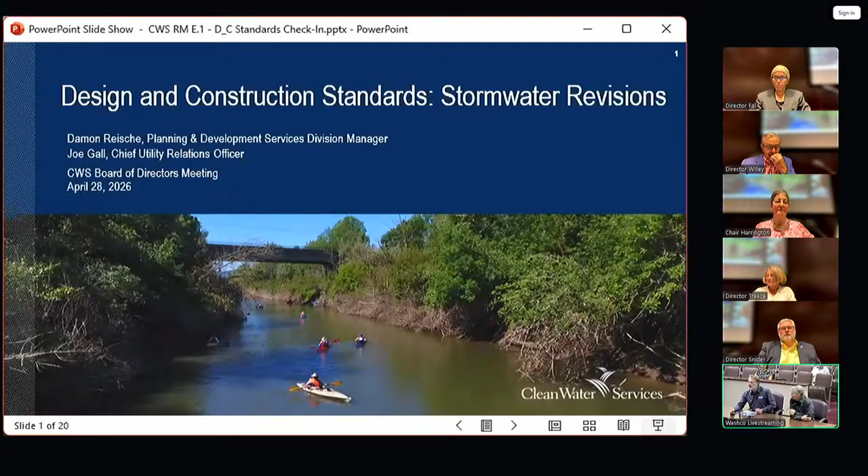Joe mentioned that this was really intended to be kind of a work session, so please feel free to ask questions as we go. There's a lot of information. We've been talking with different groups. This is kind of a summary of some of the discussions or topics that we've talked about, both with city partners and with CWAC. So please jump in if I'm saying something that doesn't make any sense.

The presentation this evening, want to touch on stakeholder engagement and our schedule. Want to talk a bit about some of the technical pieces that we're having to work through. That's the rainfall analysis, and that leads to how we size facilities and develop a design storm, and then criteria around how you decide what path you go down. And then we're on the cusp of a public draft, and so we'll talk a little bit about what you can expect with that.

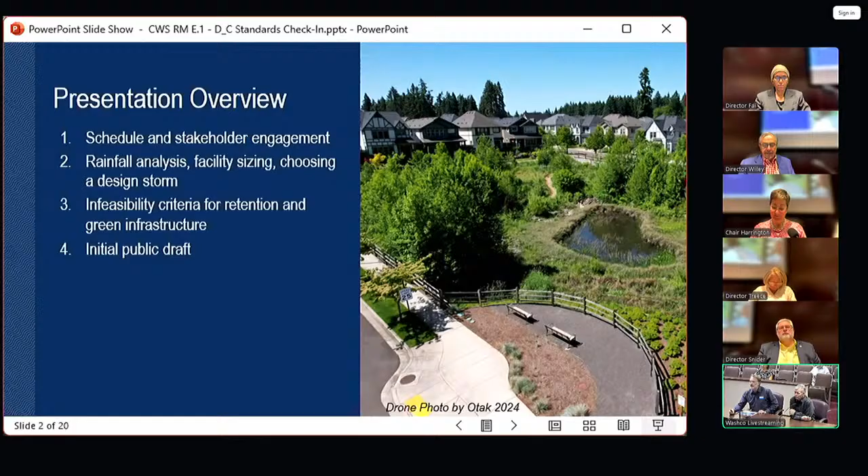Just as a reminder, this is a slide that you saw back in December. Really, why are we doing this right now? The update is being driven by our watershed-based National Pollutant Discharge Elimination System permit. We have a couple of things that we need to accomplish by November 1st of 2026, and that is to prioritize on-site retention, or it can be local regional retention of stormwater and pollutant removal. That's water quality treatment. And to do that, we have to develop a design storm. We also need to prioritize green infrastructure before either using hardscape controls or offset programs like fee in lieu.

Go ahead, please. Before you move on, I just have a question, so feel free to finish this slide if you want. No, I was about to move on. Oh, okay, thank you. So we've had a prior version of design and construction standards before. So under the why now and changes for compliance, I'm not clear on the why now. Is it that we gained experience with that and anticipated that there would be some needs through the next permit process? So we were giving ourselves a homework assignment, and now we're following up on that, or, sorry, I'm making stuff up. Nope, that's okay.

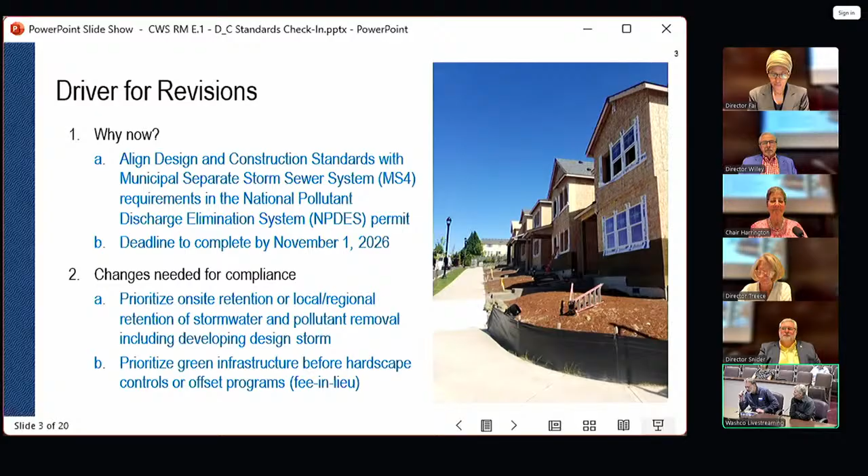So since we came to you in December to kick this off formally, we've been working with a CWS and city staff technical work group quite a bit to start to understand what we need to do, make some decisions. We've also engaged with our Clean Water Advisory Commission and formed a subcommittee out of that and have met with them. And we're just about to a point where we think we have something that we can release to the public that is coherent enough that they can understand what we're trying to do. That's the initial public draft. We're targeting the next few weeks for that.

We have a June 10 Clean Water Advisory Commission public forum scheduled. That'll be in the evening at 6 p.m., I believe. That will be an opportunity after the draft has come out for people to come and provide feedback and have some discussion with a variety of stakeholder interests.

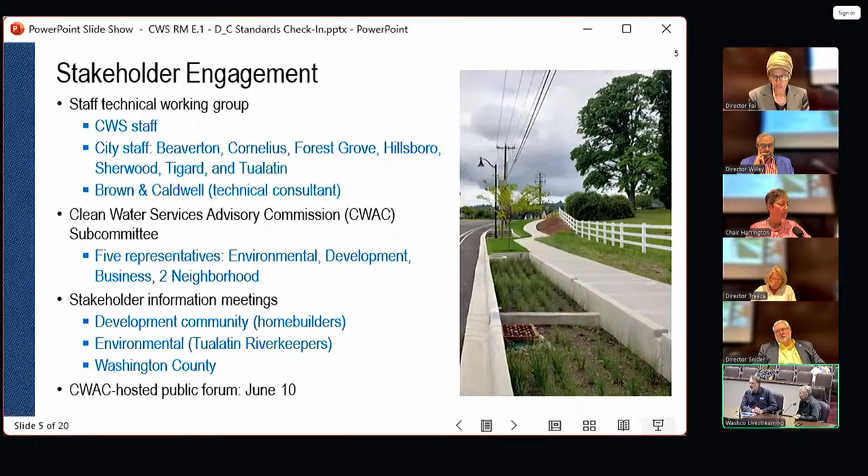It was also suggested during a CWAC meeting that maybe we could include the business community, and we're looking to see if we can go to a West Side Economic Alliance meeting. Just real quick, everybody who's interested can join or go to our website. We have a dedicated revision web page. It's most easily accessible if you go to our normal design and construction standards web page. There's a link right at the top. This is where all of our drafts will be posted and other information.

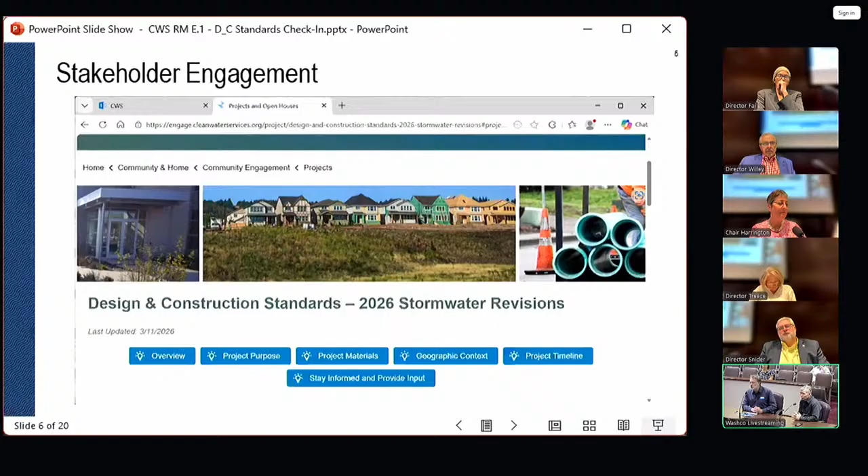We're also doing an email mailer that goes out. I think there's over 800 emails on the list. A lot of that came from developers and contractors that we work with that are in our permitting system, but we've also included other interested parties, and anyone can sign up to be on that. So if you run into people that are interested in learning more, they can go to this website and join, and it'll be announced anytime there is new information coming out.

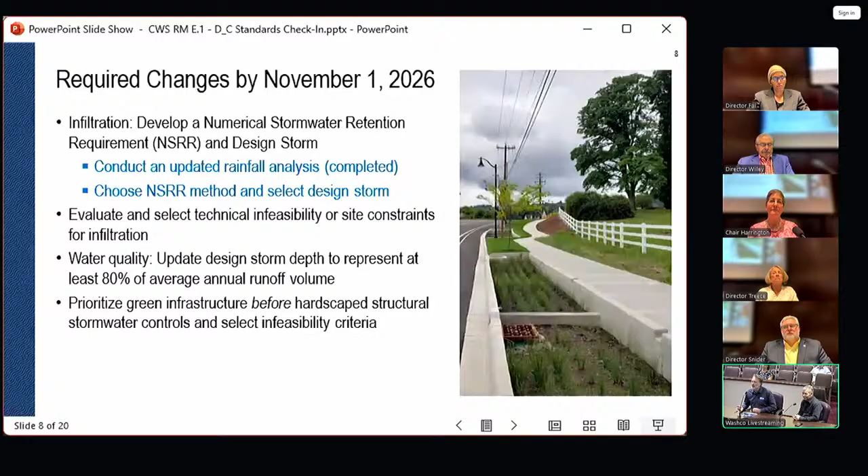So we could have two different storms that were developed differently, or we could use the same methodology, and working with our co-implementers we have gone down the path of using that same methodology. We also need to come up with what we've been calling infeasibility criteria for when you don't have to do infiltration or you don't have to do green infrastructure, what kind of bumps you into different categories.

A different way of thinking about this, a little bit more visual, is that you have this hierarchy that goes through the standards of first you need to retain or infiltrate. If that's not feasible, then you need to do at least water quality treatment. And if that's not feasible, then you can do water quality benefit offset. That's like paying a fee in lieu. With all of this, the priority is to have green infrastructure be the first choice, and kind of the same idea. If you can't do the green infrastructure, then there's got to be some reasons or criteria for when you can do gray infrastructure.

Got hydromodification off to the side. It's still a requirement. The permit is explicit that we still have to keep running that program, but really, we're going to talk about volume of a water quality storm. Hydromodification is also volume. It's a larger volume. It's more about the runoff and causing erosion in the streams. This is really focused in on water quality.

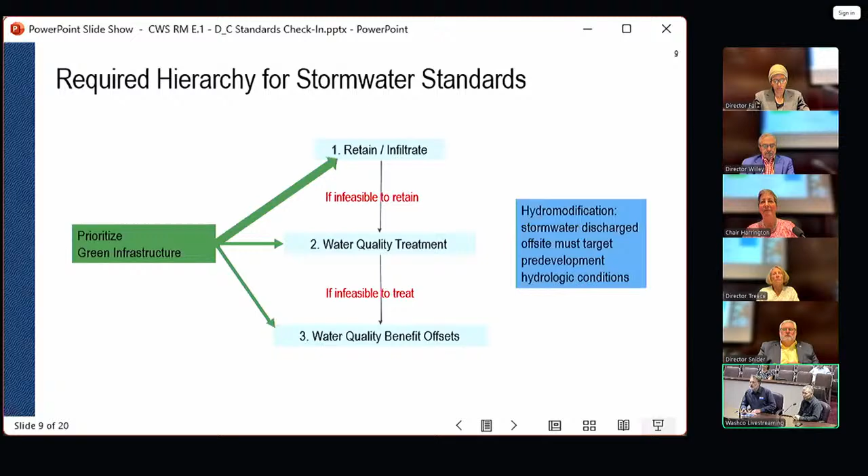So the rainfall analysis: we had an old rainfall analysis that had taken us through 2007, last updated in 2009. Our first step was to get new data up to 2022, what was available at the time. We looked at 16 gauges across our service district, took all that information, combined it, and using this average annual runoff-based method, basically what you do is you look at all the rainfall data for that entire period, and you clump rainfall events into these storms.

And the way that you do that is you figure out dry periods in between. They're called inter-event times. So the data looks different if you have a 6-hour dry period between what you call a new storm versus a 12-hour dry period between what you call a new storm. So are you lumping or splitting, basically, is what it comes down to.

And then you also have what they call this abstraction value. There's a certain amount of rain that doesn't really run off. It just gets the ground wet, and each jurisdiction has to kind of decide what that should be. We've used 1/10 of an inch so far. So that's very high level what the consultant did. There's a lot more that goes into it than that, and they run models to figure it all out.

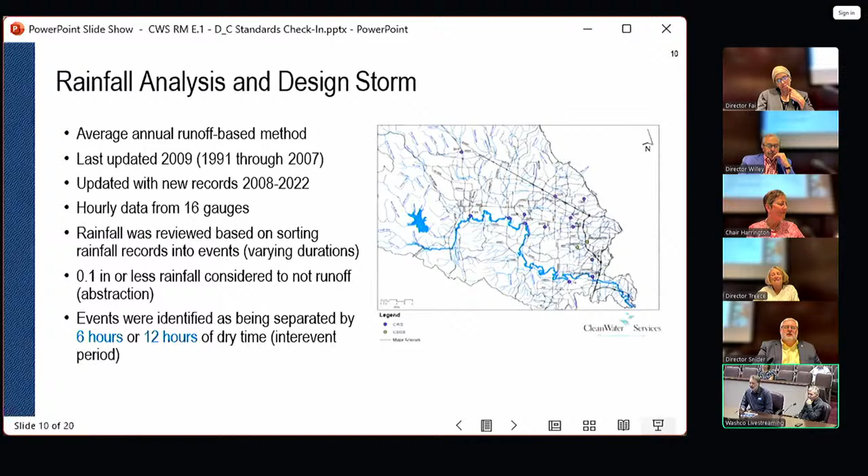Is that 0.1, can you go back? Sorry. Yes, absolutely. Is 0.1 inches or less considered to not run off at all? Is that sort of standard in the industry, or? Yeah, I don't specifically have that value in this next slide. Every jurisdiction's a little different. All those numbers are a little different.

Inter-event times can be different, but there are some jurisdictions that use numbers that are smaller than 1/10 of an inch and some that are bigger. The rainfall looks a lot different from one jurisdiction to the next as well. I'm going to talk about soils a little bit in a minute with infiltration. That can look very different from jurisdiction to jurisdiction.

So speaking of the standard and what everybody else is doing, we're actually the last Oregon MS4 permitted entity that is implementing this. Both the other phase 1s and phase 2s had to do this by 2024. We've got a little bit different kind of permit. We're a little bit behind in the cycle. That's why it's coming to us now. So we do have the advantage of seeing what everybody else did and trying to understand. So that was part of the evaluation.

I won't dig real deep into these numbers, but you'll notice that the very top category is Clean Water Services, and that our current water quality design storm is 0.36 inches in 4 hours. It's a really old method that was used back in the 90s. It doesn't even really equate to how we're talking about doing this now. So you can't scale it up. If you try to multiply that out, it doesn't work.

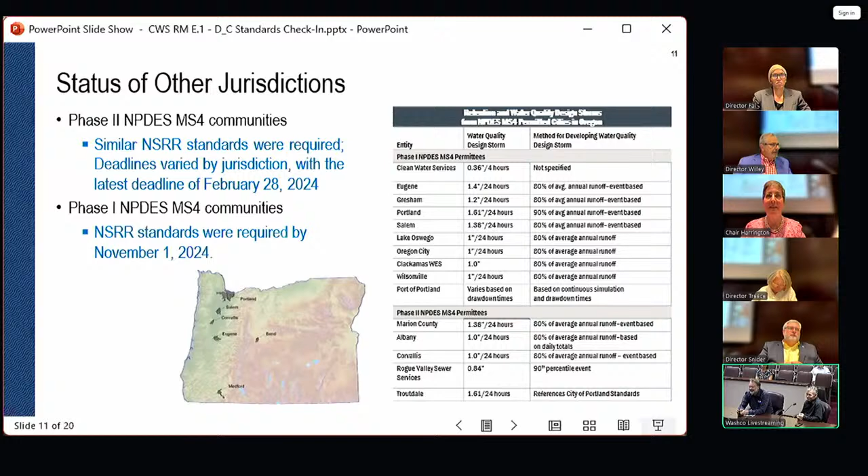Yeah. So I look forward to, before we adopt the final draft version, getting more of an overview about these design storms so that I can feel like I'm in the 2026 know versus back in the 2009 and 2022 know. Well, just wait. It's about to come. Well, you're always advancing our understanding of the important and necessary work that the agency does. So thank you. Yeah. I'm going to drag you into it a little bit here right now.

And just on design storms too, the district's got lots of design storms for different things, which is important to be aware of. So we have another design storm we look at for I&I on sanitary. And so design storm gets used a lot in engineering. So just be aware that we do have them for many different things.

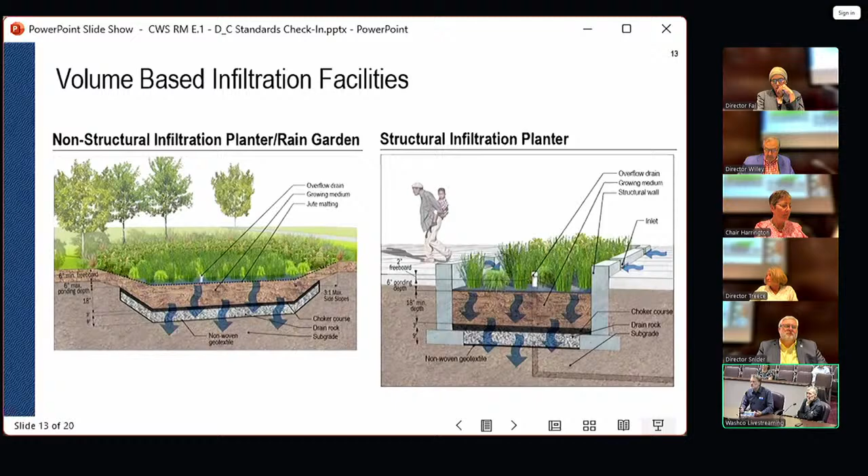So this is really a summary of all these results, the design storm, the sizing of rain gardens, what your different infiltration rates might be for different storms, along with different design storm numbers in there. So your top set of numbers, you've got the three main columns. You've got that 9/10 of an inch in 24 hours, 1 inch in 24 hours, and the 1.27 inches in 24 hours. So that 9/10 was, if I get this right, the 6-hour inter-event time, and the 1.27 was the 12-hour inter-event time.

Under that are infiltration rates, and we kind of covered a range of those. 2 inches would be very, very sandy soil that allowed water to move through quickly. 1/10 of an inch would be pretty clay type soil. And then we've got that blue column that's water quality treatment only. So then you've got rain garden and planters, and what sizing factors would be necessary in order to infiltrate the entire storm. So it's those three columns, the 0.9, the 1, and the 1.27. That's the size facility necessary to get all of that water into the ground within the 24-hour drawdown time.

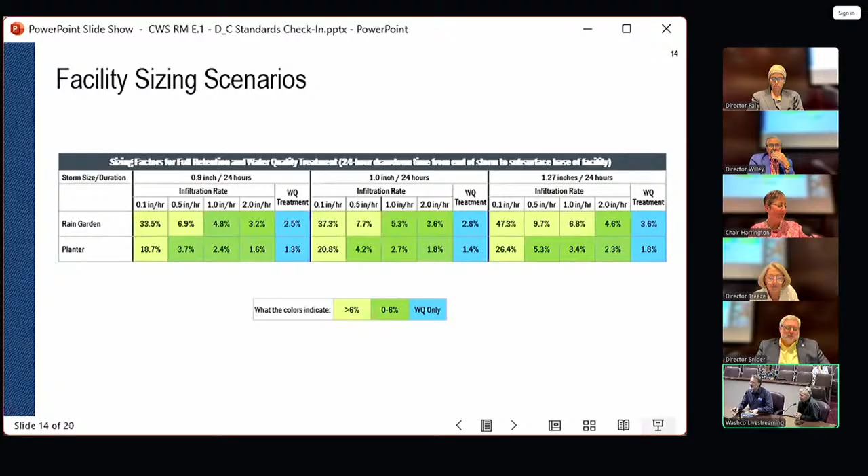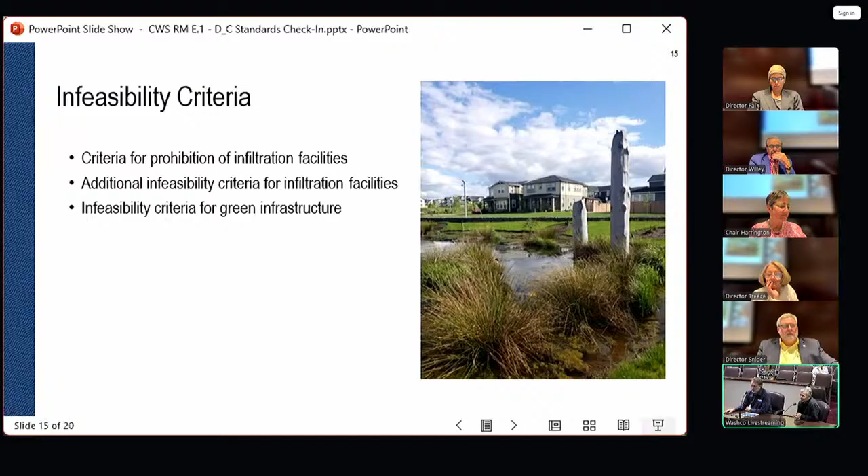So the infeasibility criteria. There's three categories that we've been thinking about. One is, where do we want to prohibit infiltration? Then there's other situations where you might not want infiltration, and then infeasibility criteria around green infrastructure. So first, the prohibition of infiltration. This is not a comprehensive list, and through the public process, we also hope to get additional feedback and maybe build this out further. But I think these are the low-hanging fruit categories.

Obviously, if you've got steep slopes or landslide susceptibility, you're not going to want to put a bunch of water into the ground, or if that ground is contaminated, or places where the groundwater is high, you're not going to get more water in. So in many situations, we might just say, nope, don't try to infiltrate. We don't want that.

But if a land developer buys a piece of property, I'm just going to say in unincorporated Washington County, urban unincorporated Washington County, wasn't sure if I said that right. Yep. Will the land developer that's coming to you for permits, or will you know if a particular area has seasonal high groundwater? How do you know that?

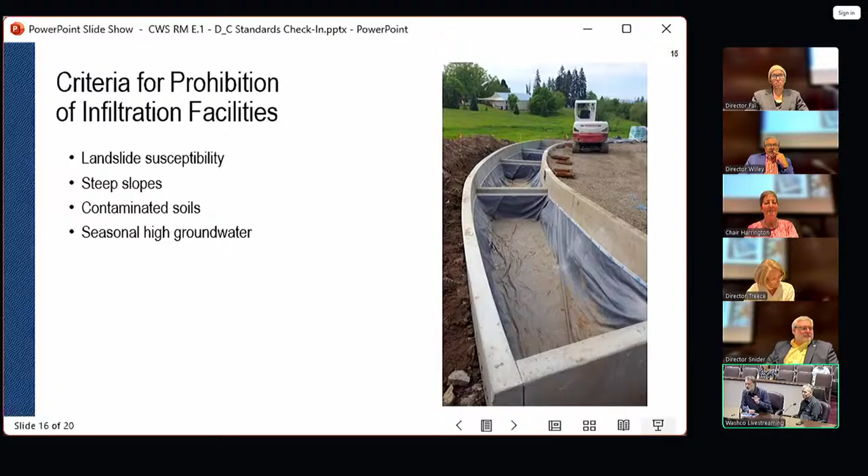Yeah, there's a lot that goes into development for sure, and we're just one piece of it. There might be reasons not to infiltrate beyond just what the prohibited situations are. And that can be anything from maybe it's hard to get drainage to the right spot, or you're in a floodway. There could be zoning and land use. That's a complicated one, and each city could be a little bit unique on that. So we're trying to figure out how to balance certainty with flexibility, always a challenge with standards.

Access to the facility and the ability to maintain it. You might be able to fit a facility in, but if our field ops can't get to it to do maintenance, that's problematic. And then also protected natural features like wetlands. If it's going to cause an impact to a natural resource, it has to be evaluated what's the greatest benefit.

Just a quick interrupt. Yep. We're at 6:15. I'm getting close.

Okay. I don't really know what I'm supposed to understand from the pictures, but because of time, I'll just leave it there. Okay. They do represent some of the common development that's going on, but they're not critical. But they're real-life development pictures in the service area. I get that.

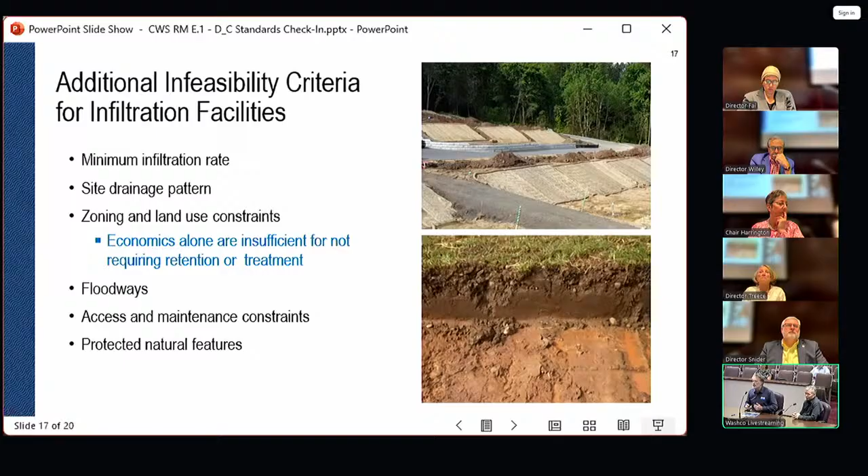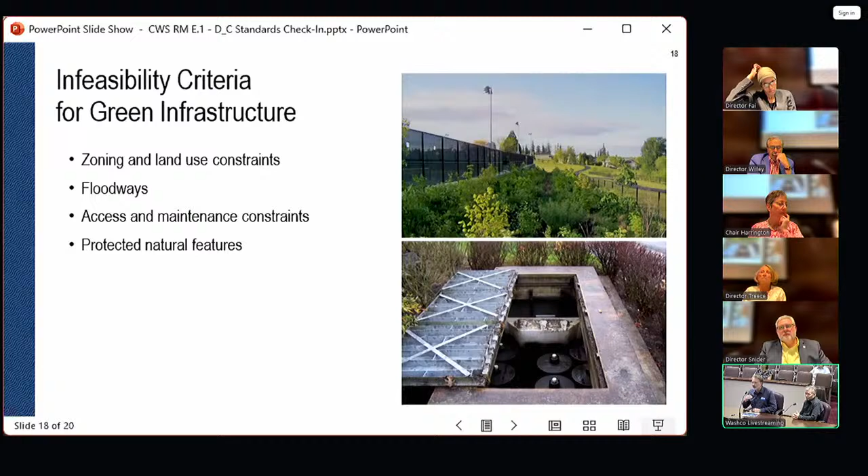Green infrastructure infeasibility criteria are very similar kinds of things. You're just looking at it for green infrastructure. And I think the initial draft is probably going to land on you work through the green infrastructure first and then think about infiltration, just because everything kind of comes back to the green infrastructure. So I mentioned at the beginning of the presentation that we were anticipating in the next few weeks that we'll have our first public draft. We're going to have in that draft a 1-inch 24-hour storm.

This whole idea of retention infiltration is new in the standards. We do have a water quality section. I think that's our section 4.04. I think that section is going to be crossed out in its entirety, and we're going to just have a new section to replace it. And that will also include the water quality treatment piece.

The low impact development approach section that is roughly equivalent to the green infrastructure will probably just be incorporated into section 4.04. Infeasibility criteria also end up kind of getting worked into that. And then later on in the chapter is where you get to the specifics about the design storm and how sizing works, and that's in current section 4.08. I mentioned those sections because those are the two sections where the most changes are going to be.

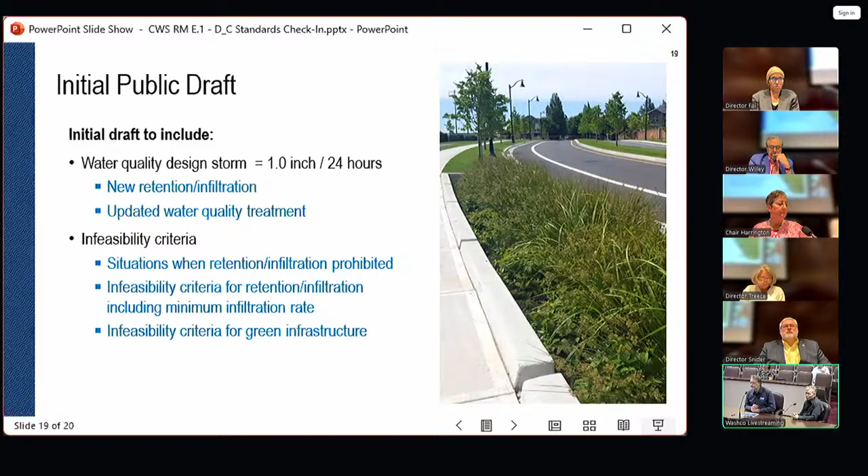Okay, now it's time for board discussion. We have a good 5 minutes here. But first, do you have any questions? No, that was a good presentation. I have one. It is a great presentation. Thank you for mentioning that.

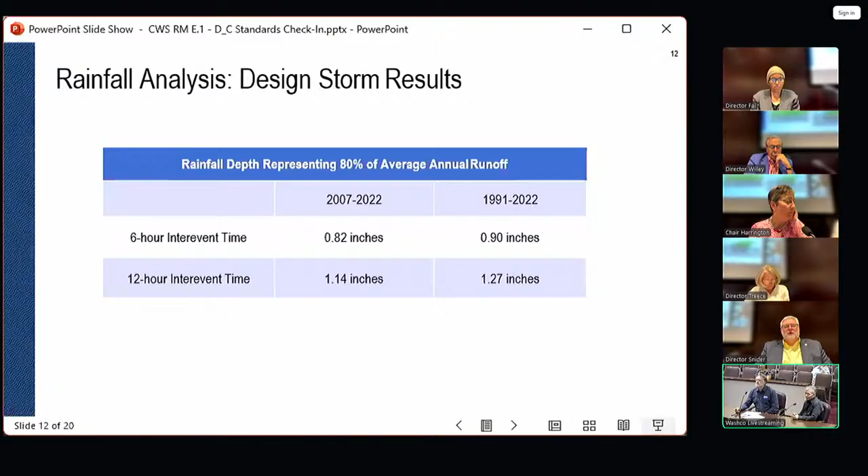I have one question on the engagement process. I do realize, and I've looked back at slide number 4, and I do recall that there is a member of the development community that is on CWAC. So that's good. But I also want to make sure that there's proactive notification to the Home Builders Association government relations person, so that they know we have an initial draft and what the process is, just in case that communication between those two parties isn't real strong.

I think that communication is strong, but I've also been talking with the Home Builders Association, and we're working on setting up a meeting specifically with them. Terrific. And also, I can't remember the scheduling of the Washington County Design Forum that LUT has. Oh, yeah, the developer. Yeah, that may be another. Just occurred recently. There'll be another one in the fall. I think it will be about the same timing that we're bringing this in to the board. They have a mail list, you might want to ask.

Yes. Can't hurt to over-communicate, right? That's a good suggestion. Thank you. Because these updates sound reasonable to me, but I'm not in the business like they are. That was the only comment I had on your first question, on whatever slide number that was. The engagement, yeah. Any other board members, any questions on that? Nope, looked good to me. So, any other additional information needed? Okay, very useful. Thank you. Great. Good use of time. Thank you. Keep up the good work.

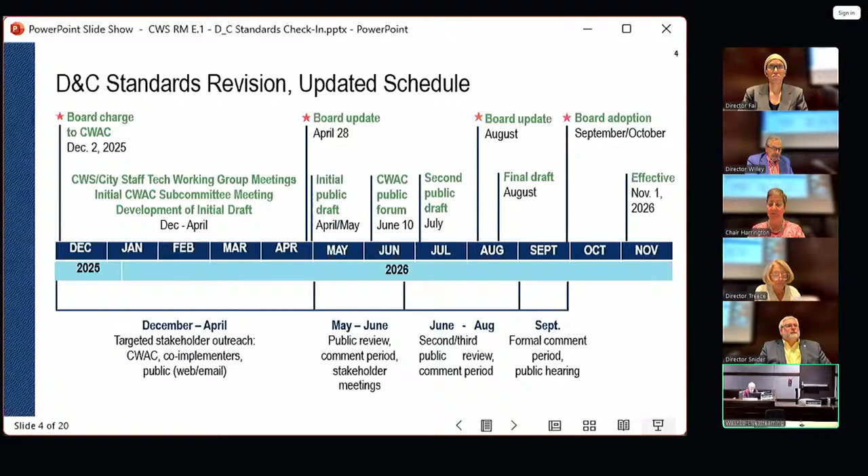On Tuesday, May 12th, the Clean Water Services Board of Directors will have a business meeting starting at 9 a.m. And immediately following that, we will have a CWS Board of Directors work session. Tuesday, May 26th, we will have a Clean Water Services Board of Directors business meeting starting at 5:30 p.m. right here, just like we did tonight. And then, Tuesday, June 9th, we'll have a Clean Water Services Board of Directors meeting starting at 9 and a work session immediately following. So that's what's coming up for the next 5+ weeks. Any other Board of Director announcements for today?

Okay, well, without further ado, I would ask for a motion to adjourn the CWS Board of Directors meeting for this evening. Second? We have a motion and a second. All those in favor, please vote by raising your hand or saying aye. Any opposed? The motion carries unanimously 5-0. Thank you, everyone. And at 6:30, we will start the Washington County Board of County Commissioners meeting. Thank you.